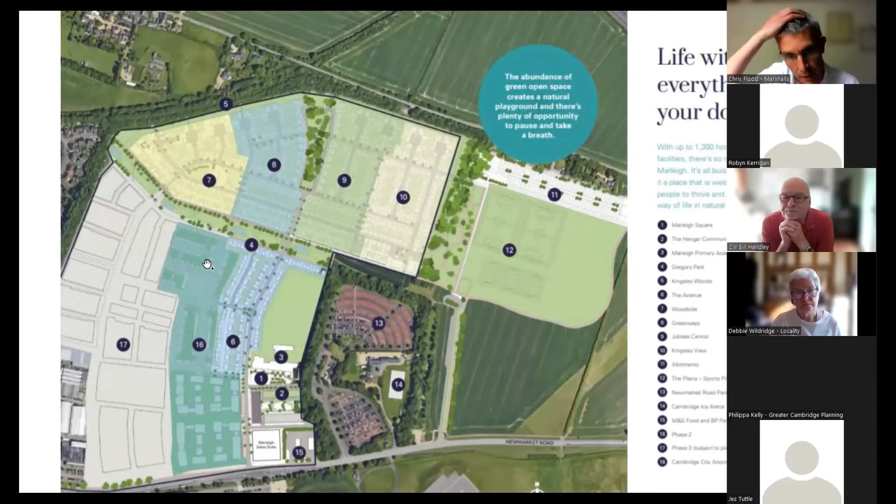This evening we're going to provide an update on phase 1 and phase 2, which are both consented phases within the Marleigh scheme, totalling 968 dwellings. Hopefully you'll be able to see my cursor, and I'll orientate you around the scheme before going into the detail of the phase 1 and phase 2 updates.

Just down at the bottom here is Newmarket Road, and what you can see labelled number 15 is the petrol filling station on Newmarket Road, which should give a good indicator of whereabouts we are on the scheme. Moving my cursor south to north, this is Marleigh Avenue, the main primary road into the scheme.

What's labelled number 6 is what we call phase 1A of the scheme. Phase 1 is split into 5 development parcels, with 1A where my cursor is. Moving to the back of the scheme, 7 is development parcel 1B, 8 is 1C, then 1D, and 1E labelled number 10. So we have 5 parcels within phase 1 of the scheme.

Over on the right of the screen is what we call the plains, where all of the sports provision for the Marleigh development will be. We'll have 2 large full-size sports pitches and 3 junior pitches in the fullness of time, along with a sports pavilion roughly where my cursor is, accessed through what is currently the construction haul road, but which in the fullness of time will be the access for the sports pavilion and pitches.

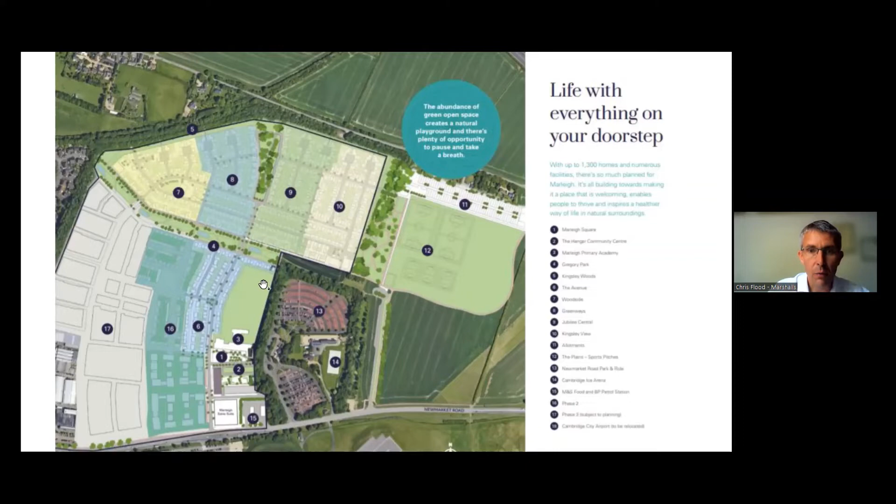If I just move on to the next page, I've summarised a couple of the key highlights within phase 1 and phase 2 of the schemes, to give an update on where we are. Phase 1 will be delivered over 5 build phases, A through to E. In summary, phase 1A is now fully complete and nearly all occupied.

For those who have walked or cycled through the scheme on the cycleway, you'll see a lot of construction activity towards the back of the development now. Phase 1B is underway, the next 88 homes, within which 47 are private dwellings and 41 will be affordable housing, handed over to L&Q, the affordable housing provider on both phase 1 and phase 2.

Phase 1C has recently started on site, and for those driving or cycling through the scheme, you'll have noticed the next build parcel is underway, 1C, for a further 86 homes. As we see on the screen there, that's in early construction.

With regards to the hangar building and Jubilee Square, I'll come on to some drone pictures later. We held a community event, the first large community event, on the 11th of June, a couple of Saturdays ago, which was a really successful event. We had over 300 people in attendance, and that was the first event where we were actually able to open up Jubilee Square to the community, and equally open the doors on the hangar building so people could go into the new community hall and see what an amazing facility that will be.

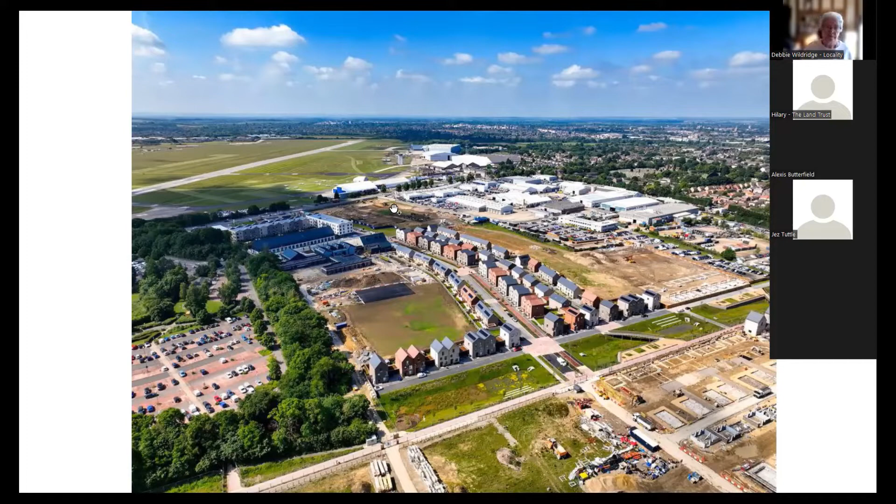Moving on, here's more of a bird's eye view of the new Jubilee Square, where my cursor's hovering now. This long building here is the hangar building - a split use building. The first half, where my cursor's hovering, is the community hall, available to the community of Marleigh and the wider local community. Further down the building, this will be split between Monkey Puzzle, a commercial nursery provider currently fitting out the lower floor, and on the upper floor there will be an office we're currently looking to let through a commercial agent. Sandwiched in between, there will be a cafe, also being let at the moment, hopefully opening soon. You can also see the private apartment block facing Marleigh Avenue, with the affordable housing block wrapping around the side, and on top is a shared podium garden for all the occupants of the apartment blocks on phase 1A.

Over here is another good view of what we've just recently started on phase 2 - these are just foundations for the first apartment block going in on the front here, behind the hoarding on Newmarket Road.

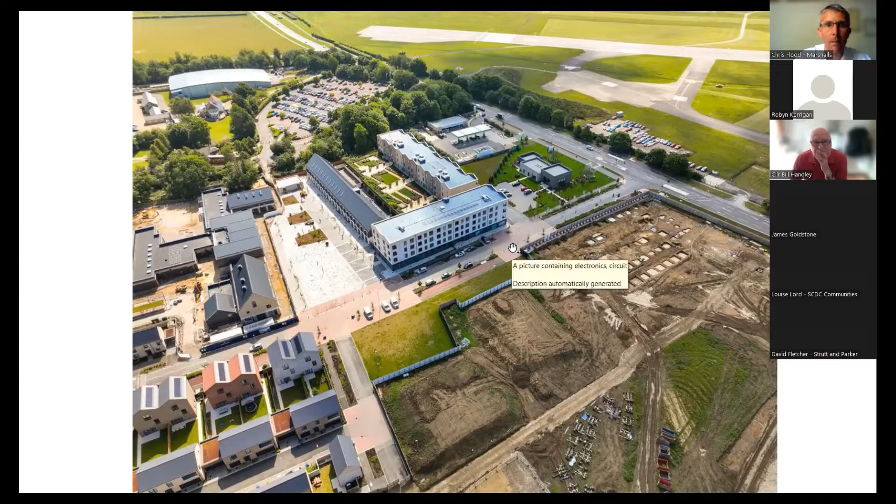Moving on, another really good drone shot. This is hovering nearly over Newmarket Road, looking back towards the back of the scheme - development parcel 1B, where my cursor's hovering. What you can see, following slightly behind in terms of construction sequencing, is phase 1C.

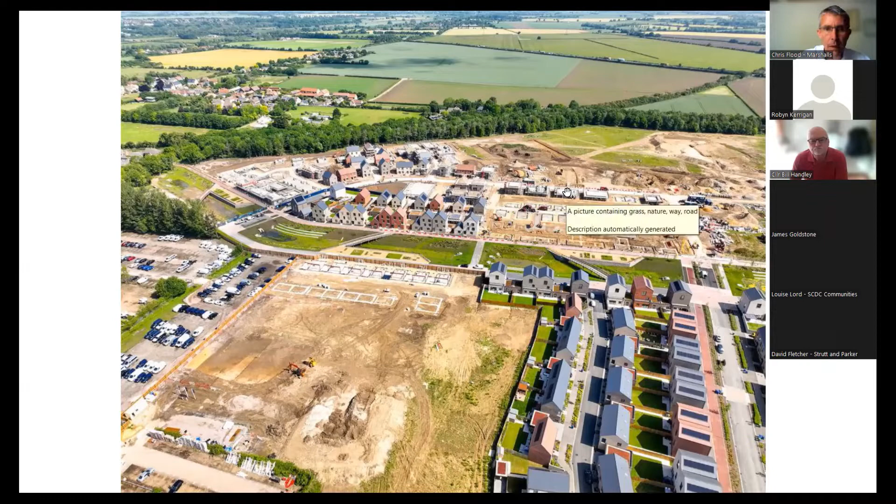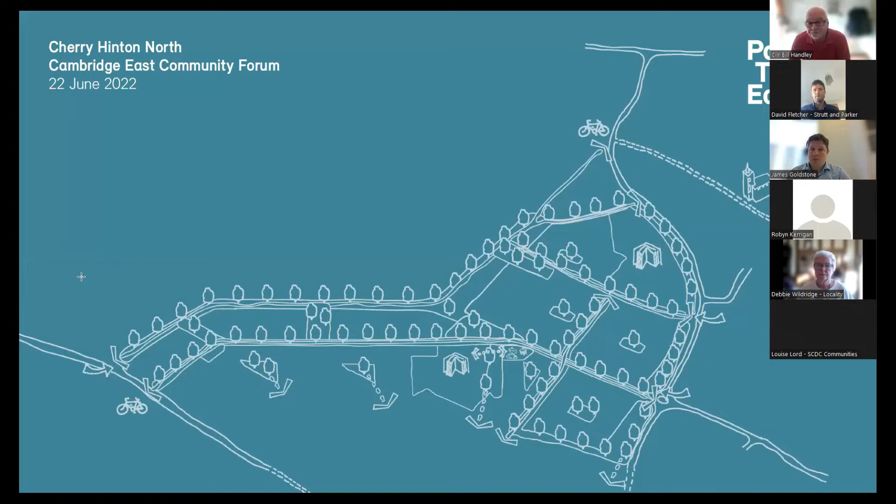So just to introduce myself, I'm David Fletcher, a planning consultant from Strutt and Parker, and we're acting on behalf of Bellway Latimer, who are the developers for the site. James, you wanted to move on to the next slide. Today we're going to do a bit of a whiz through on a number of different subjects, hence why we've got four speakers. I'm just going to provide a very quick planning overview, and then we've got Paul Keating, who's going to provide an update in terms of what's going on site at the moment.

Alexis Butterfield's going to provide an update in terms of the design code process we've been through, and a high level overview in terms of our infrastructure application. James Goldstone is going to wrap up with an update on public consultation events we did earlier this year. James, we'll move on to the next slide.

Firstly, just so everyone's clear where the site is, we're to the southeast of Cambridge, immediately to the northwest of the site is Marshall's Airport. Access from Coldham's Lane to the southwest, and then Airport Way, Cherry Hinton Road on the east side of the site. Outline planning consent was granted back in December 2020.

Since then, we've been working very closely with the Greater Cambridge Shared Planning Service and a range of consultees on a number of work streams. Next slide.

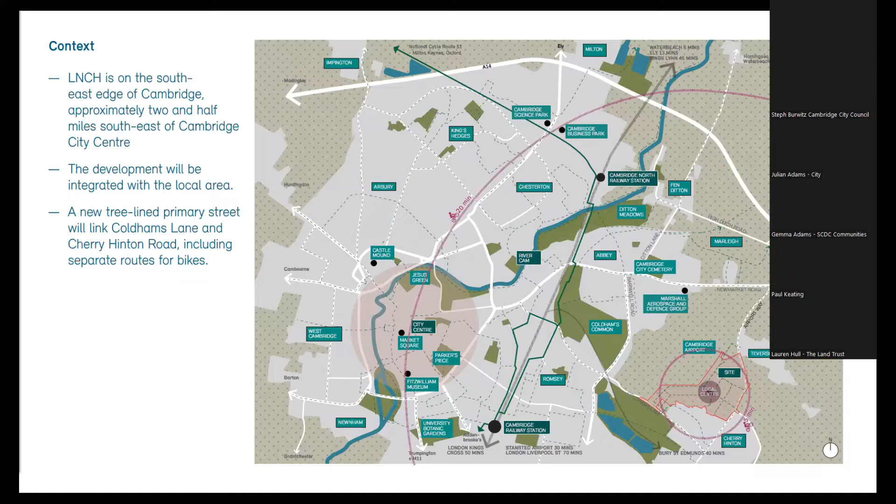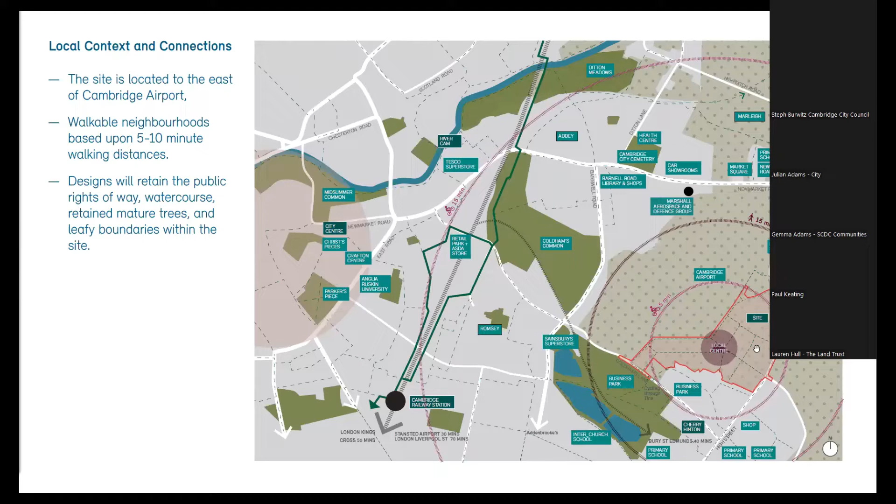This has culminated in us, in May, submitting the site-wide design code for submissions that's currently with the Shared Planning Service for determination, along with a Section 73 application which proposes some minor changes to the outline consent, a number of which we think are quite positive changes, particularly around enhanced energy efficiency of the dwellings across the site. It also responds to some minor changes to the parameter plans approved under the outline consent that were discussed as part of the design code process.

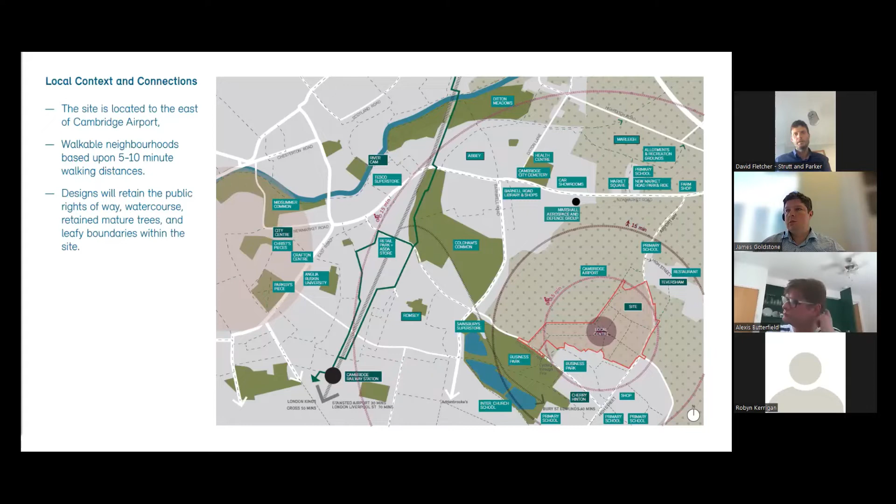Next slide. We're currently in discussions with the planners around the infrastructure application, which is the next application we're looking to submit on the site, targeted for end of June, early July, and then we'll commence discussions after that in July on the first phase reserved matters residential application on the site, which will be for up to 400 units.

We've also submitted a number of our planning conditions for discharge, a number of which have already been discharged, some relating to works currently being undertaken on site, including archaeology, which is a nice segue into Paul to talk a bit about what's going on site at the moment.

Yeah, thanks, David. Good evening, all. My name's Paul Keating, representing the LLP. To give you a bit of an overview of what we've been up to.

At the moment we've been undertaking a number of surveys and site investigations, including ecology, ground investigation, topographical, and unexploded ordnance surveys. As you may have seen driving past the site, archaeology is progressing well on site, in advance of the gas main diversion, which will be taken out later in the summer this year. We've also got some removal of contamination to clean up the site before we get going with works.

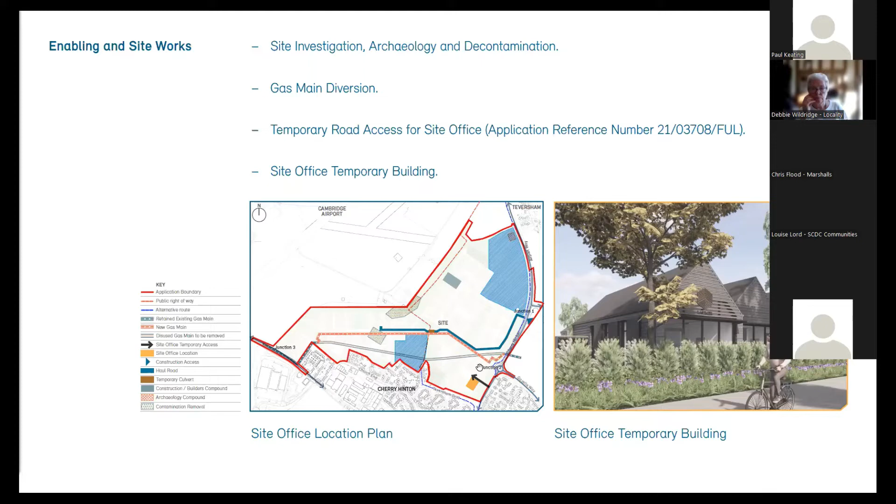We're also constructing a temporary access off of Airport Way for a haul road into the site to undertake these works. The other thing you've probably seen on site is we're constructing our temporary project office, and that's going very well at the moment. If we go on to the next slide, please.

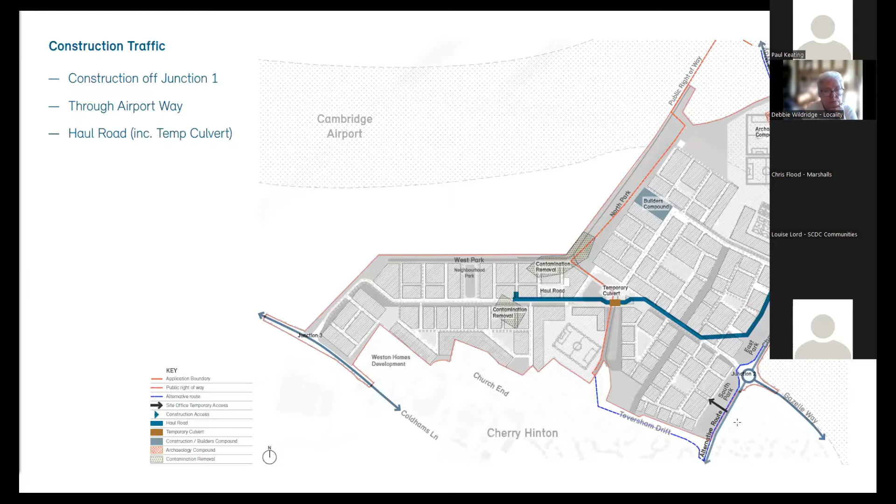So this diagram shows pictorially how we're proposing to construct the site. The first junction we'll use is the consented junction 1, but just as a temporary access at this stage, so we won't be forming the overall junction yet. All construction traffic will come in through Airport Way rather than through Cherry Hinton to feed the development.

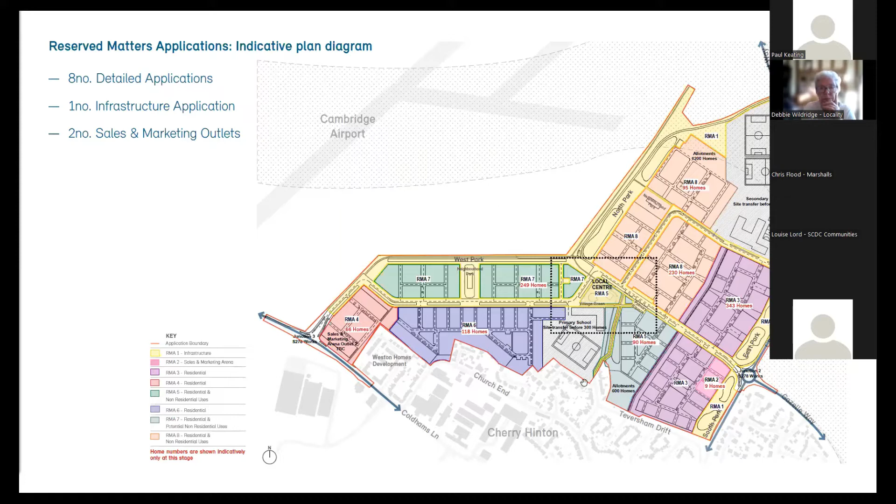This gives you an overall feel for the site, split into 8 build phases, plus an infrastructure phase and the sales arena. We'll be constructing from both ends, from the Cherry Hinton Road end and Coldham's Lane, with a sales outlet at either end. We'll be feeding the whole site off Cherry Hinton with the haul road going internally rather than from outside. You've probably seen this drawing too, with the primary school and secondary school noted here. That's it for me.

Hi there, Alexis Butterfield, partner at Pollard Thomas Edwards. We're the architects and master planners for the scheme, and we've also just completed the design code.

Essentially what you can see here is hot off the press, exactly where we are right now in terms of the first of our reserve matters applications, which will be for the site-wide primary infrastructure, the major infrastructure on the site. That's the street network, street trees, and cycle routes along the primary street network, not all the other streets, just that. Also associated with that are the main green spaces, which will be handling all the sustainable drainage incorporated within the landscape.

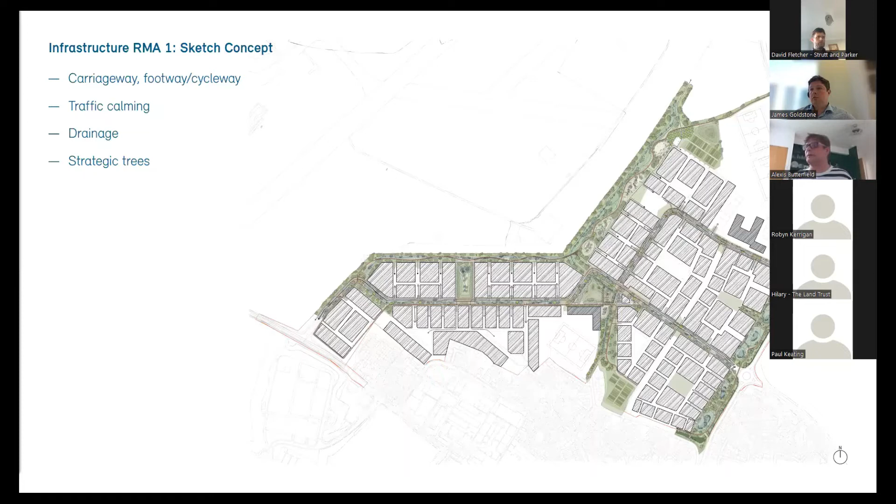So we're having to tie together all these different things: the large green areas with sustainable drainage and landscaping, and the routes through them, which are the streets and trees along those. The other thing we're doing, right in the middle of the diagram in the green triangle area, is starting to design what will become the local centre. The triangular area there is the village green. We're also starting to design the hard landscape areas of the new market square, but none of the buildings at this stage.

So how did we get there? We've been working on the design code underlying all of this for about 8 or 9 months. That design code is a site-wide document that will control the whole development and each reserved matters application as it comes forward, including this infrastructure. It covers all the landscape, public spaces, and also the buildings and their layouts, the quality of those, street scenes—how buildings and streets come together—and finally, very importantly, sustainable design, making sure these perform at a really high level.

To do that, we've been working with the government's new National Design Guide and National Model Design Code. What's really helpful for us is that it means we're able to cover many different aspects of design—not just building design, not just landscapes, but how these come together. The 10 characteristics of a well-designed place, which those documents focus on, include things like careful use of resources and thinking about the lifespan of a development, how it's managed. That's something we've really incorporated into the design code.

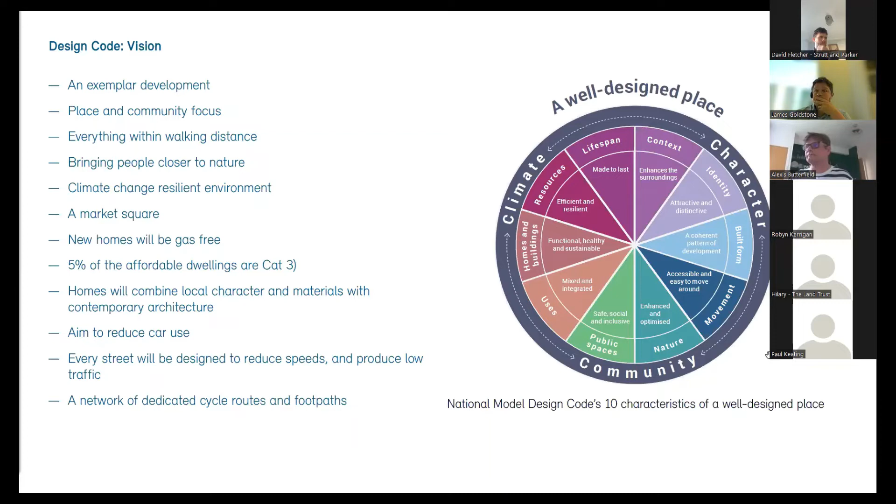The other thing we've done is start to think about how things interconnect, using the code to think about how landscape needs to relate to the careful use of resources, how you move through the landscape, how streets interact with landscape, and how we make space for nature within all of that. Conversely, for buildings, we're thinking not just about building design, but how they're used, how they're managed, and how they're made accessible.

So coming from all of that, we developed a framework master plan. This framework master plan underlies all of the different diagrams set out within the code, and they really help put flesh on the bone in terms of how things are distributed and where critical routes go, and particularly green spaces.

The emerging master plan also makes a number of key interventions in terms of improvements on the original outline scheme. First of all, by making sure there are a whole range of different interconnected green spaces throughout the development.

Also making things like a traffic-free route which runs from the secondary school right down into Cherry Hinton. And finally, making sure we make good connections for walking and cycling to the surrounding area, particularly to Cherry Hinton as we join on to the south side of the site.

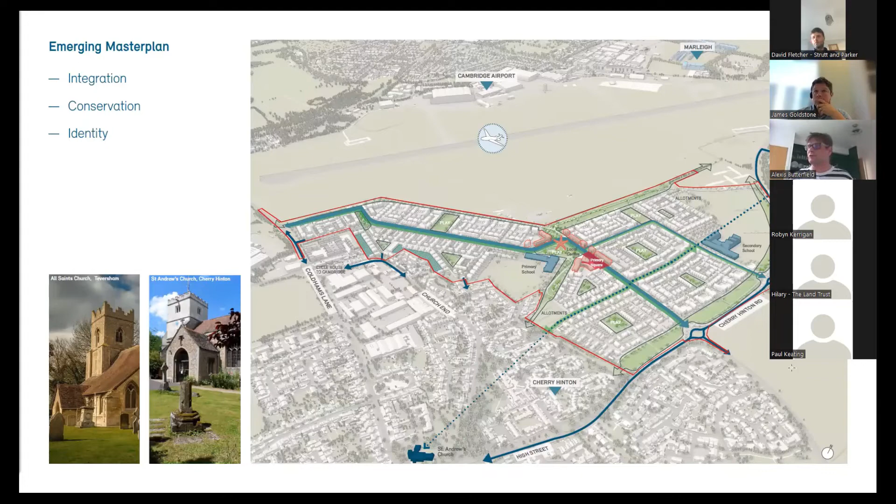This is a typical diagram from the design code, so sometimes quite dry, but what they do is establish that framework I was talking about, making sure green spaces link together to create natural and green corridors, so you're able to move through the site always walking within green or tree-lined spaces.

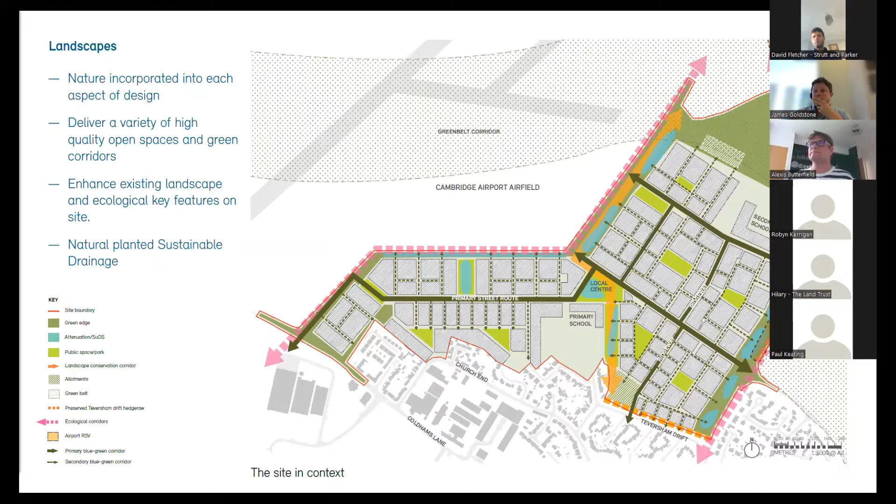And then those public spaces - there's a whole range of different public spaces within the code. A lot of those are green parks, which centre onto each of the different neighbourhoods. There's quite a few of those.

And then there's also this very important point in the heart of the development, which is the market square. In the market square, we spent a lot of time thinking about how all of the different uses come together in different building types to create what we've called a family of buildings. Key to that is not just the architecture, it's thinking about the use of those buildings and how that use needs to be flexible and might change over time.

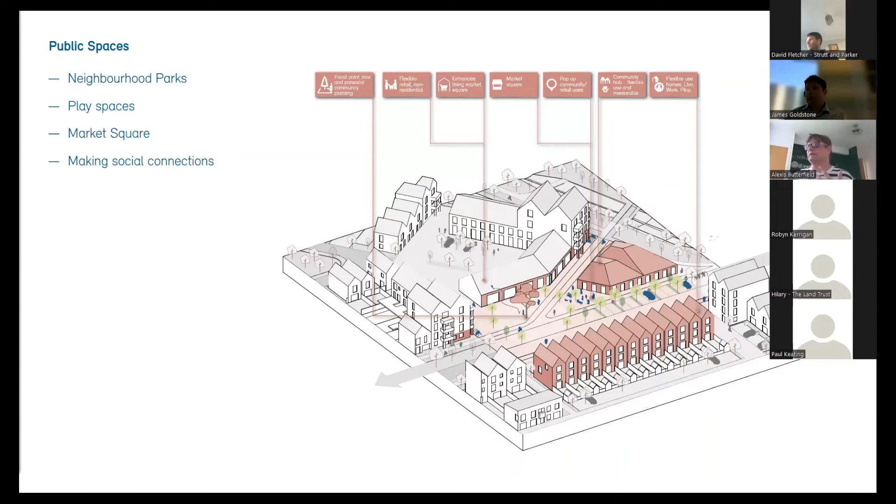A lot of this is about street design, and the first thing is we've thought about streets as not just roads, but actually streets that are for people and space for people, ensuring we have tree-lined streets and that we prioritise those streets for walking and cycling.

The other thing we've done is think about how buildings relate to those streets, so how we can create focal points and places for activity, so that as you come to a key place within the street, you can sit down, or there might even be a little bit of play, or just a focal point tree.

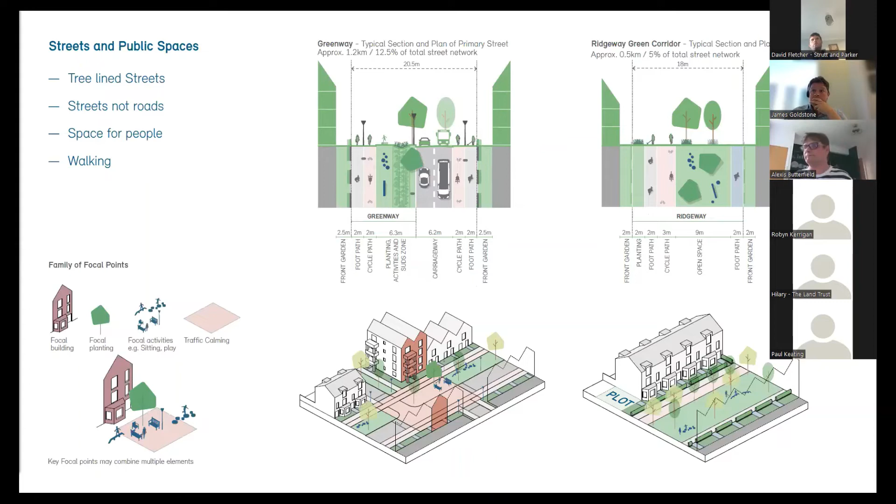The appearance of buildings is covered within the code, particularly thinking about how we can incorporate both the traditional architecture of Cambridge and the surrounding Cambridgeshire villages, but also really reflect contemporary design within Cambridge, which is particularly strong. The other thing the code does is establish a baseline of good quality materials and also sets out how they need to be used.

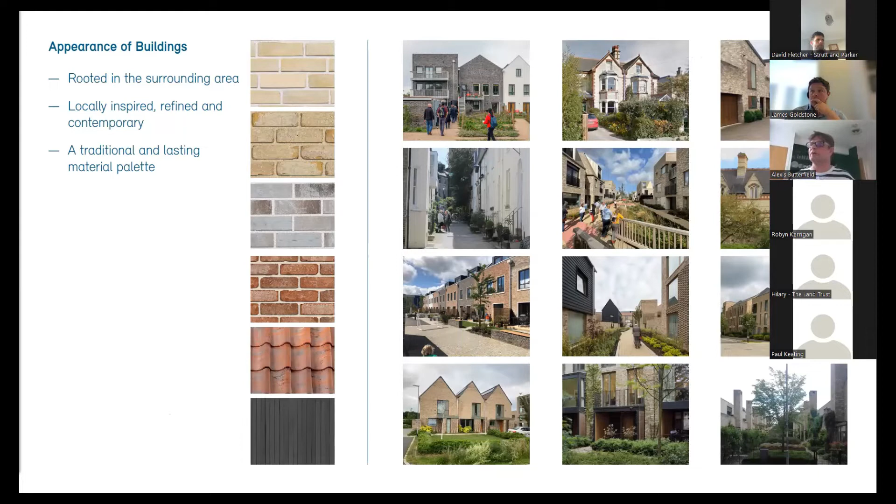And then finally, for me, a lot of the code focuses on how all of this comes together to create a sustainable environment. In this example of sustainable buildings, we emphasize moves like dual aspects, making sure we're getting sunlight and daylight from all sides, focusing on natural ventilation so people aren't forced to have air conditioning or expensive fans, particularly as things get warmer in the future. It's a very warm day even today.

And really all of that's about building in fabric first principles. So not relying on gizmos, but making sure that the architecture is doing the job. We've used the code to make sure that happens.

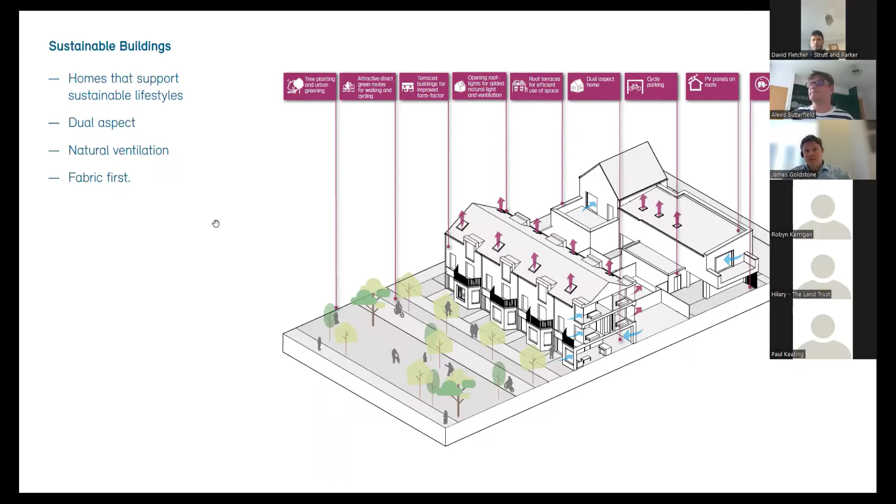Thank you, Alexis. So my name's James Goldstone. We work for Connect. We've been supporting the joint venture with their community engagement.

First thing to say is that the project team, the joint venture and the officers we've been engaging with have been fully behind a comprehensive consultation programme as we move towards the design code, up to the design code submission and the reserved matters applications. So we've had in-person events, ongoing dialogues and meetings with parish, district and city councillors, and meetings with stakeholders on request. The feedback has been collated, and a lot of what we've done up till now has fed into the recent design code submission.

The feedback we've received has led the project team to prioritise active transport over vehicles, with generous landscaping, biodiverse proposals, and flexible public spaces.

I'll go into a little detail about some of the surveys we ran in addition to the consultation drop-in events. We recently surveyed local residents and made sure this was shared with local schools, to get a diverse range of voices.

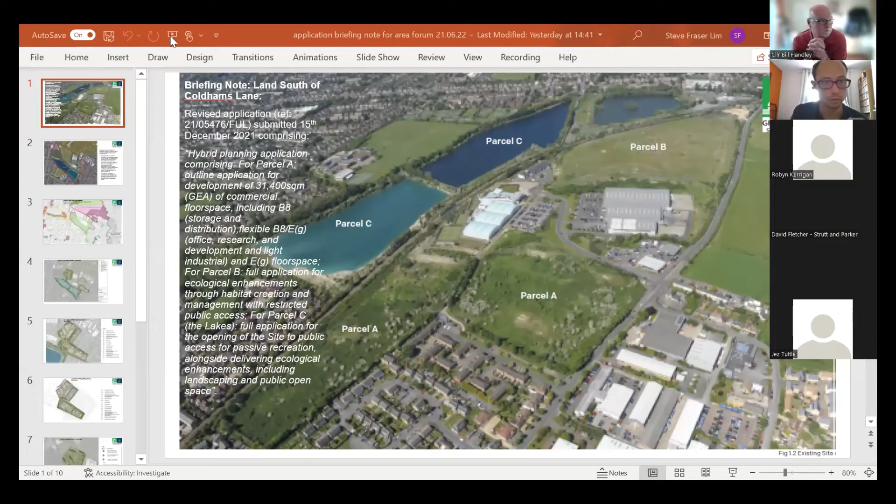So yeah, this is the site, land south of Coldham's Lane. It's divided into 3 parcels. The planning application was submitted at the end of last year for the redevelopment.

So parcel A, sorry, just go back a bit. It's a hybrid planning application, meaning parts of it are submitted in outline. Parcel A is the outline bit, which is the developed part, and parcels B and C have been submitted with full details for the creation of a public open space. For parcel A, it's an outline planning application for 31,400 square meters of commercial floor space, including B8 storage and distribution, and E(G) office, research and development, light industrial uses.

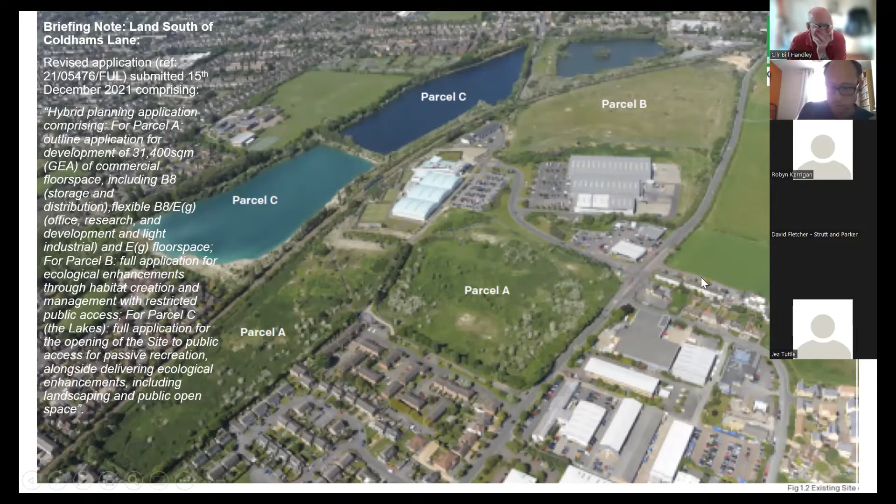The application is an attempt to address the reasons for concerns raised with the previous application, which was subsequently withdrawn. The main areas where it differs from the withdrawn scheme are a change to the mix of uses proposed, with a reduction in the storage and distribution element and more business uses such as office, light industrial, and research and development. There's greater separation between some of the blocks and the adjoining streets, and the application also includes proposals to lower the carriageway in Coldham's Lane beneath the railway bridge, to allow access for larger vehicles onto Barnwell Road and Newmarket Road.

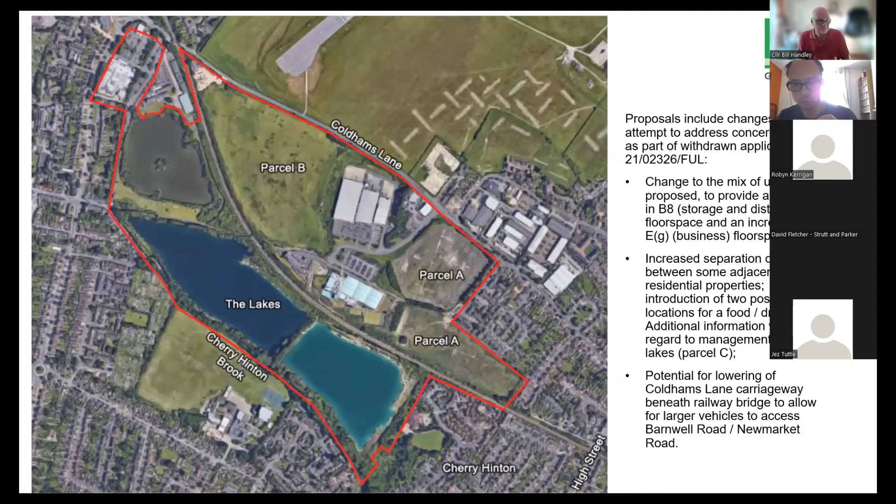Just a bit of context in terms of the local plan: the site is identified as an area of major change with potential for commercial development. It's also protected open space and a local nature reserve.

This shows the site-wide illustrative master plan. You can see parcel A is the bit to be developed with the new floor space, parcel B is going to be maintained to maximise biodiversity, and parcel C is the lakes, which will become the new country park with public access.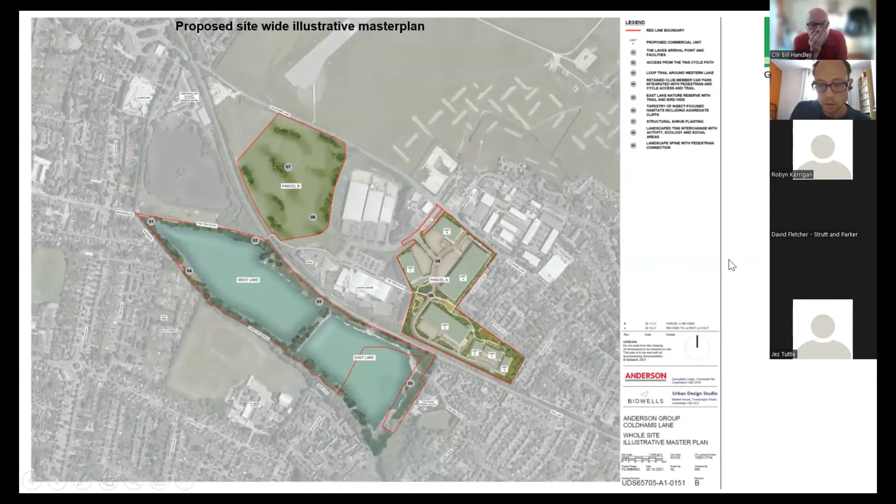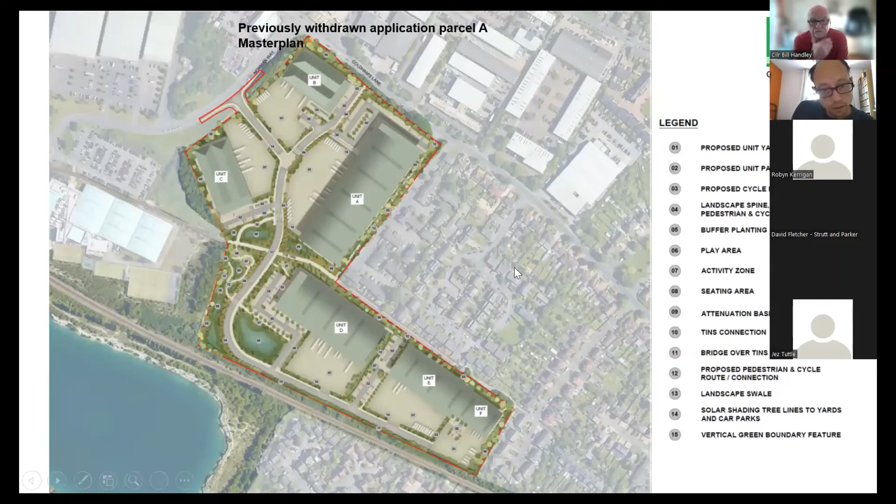This plan shows parcel A of the previously withdrawn application, and you can see the location of the development blocks and their proximity to some of the residential houses around. The current proposal brings those a bit further away from the surrounding properties.

And then you can see the bottom part of the site, the south, where there's unit D, unit E, unit F. That layout has changed quite a lot, because that's where the more office and research and development type uses are.

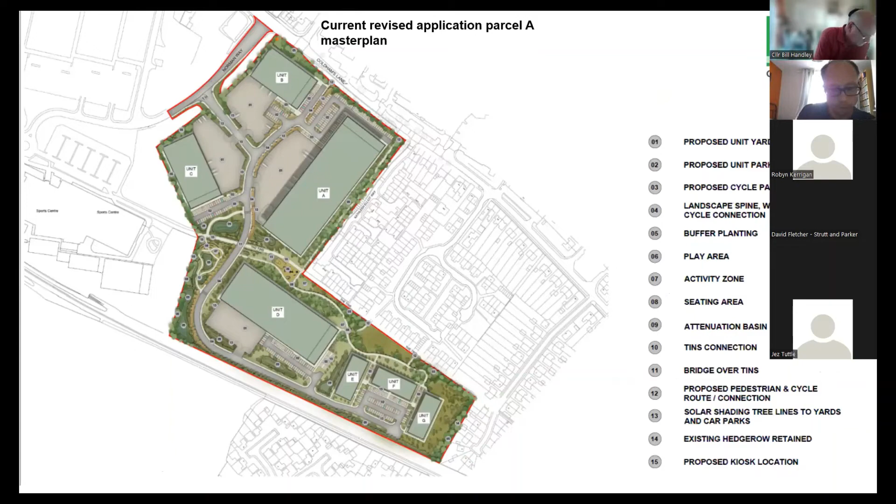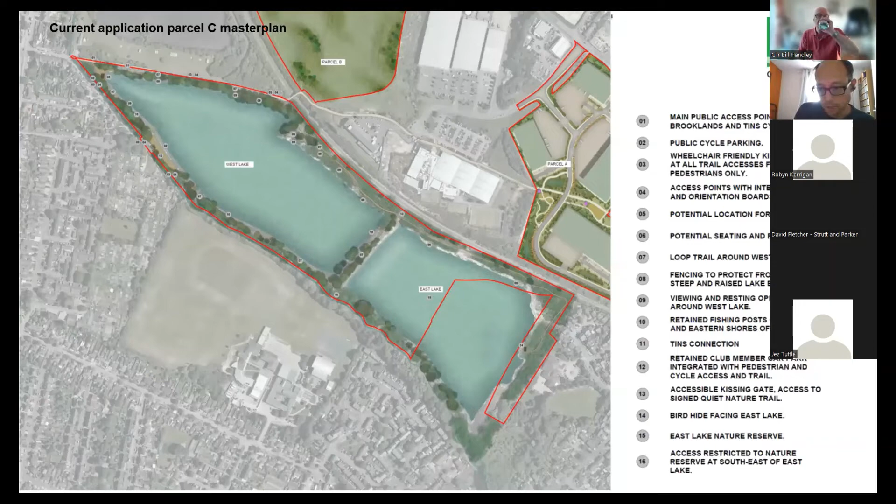The application was submitted at the end of 2021, beginning of 2022. A large number of public consultation comments have been received, with a lot of concerns raised around the unsuitability of the proposed uses, in particular the storage and distribution, impacts on air quality, noise, biodiversity, and proximity to the adjoining residential properties.

There are also a number of comments received from statutory consultee groups such as Cambridge Friends of the Earth, Cambridge Past and Present, Cam Cycle, the Wildlife Trust, County Highways, and so on. A number of concerns raised there as well about securing the public open space, future management arrangements, and how long that's going to be for. Some further information requests in terms of the transport assessment and the drainage strategy, and concern about the noise impacts and the suitability of the site for B8 use.

The applicants are currently considering all these consultation comments, and there are also discussions ongoing with the Environment Agency around the ground contamination aspects and what would be a suitable remediation strategy. Council environmental health officers have been involved in that, and they're generally considering the way forward for the proposals given the strength of concerns. At some point in the future, unfortunately we just don't know yet when that's likely to be, they'll be submitting some revisions to the application.